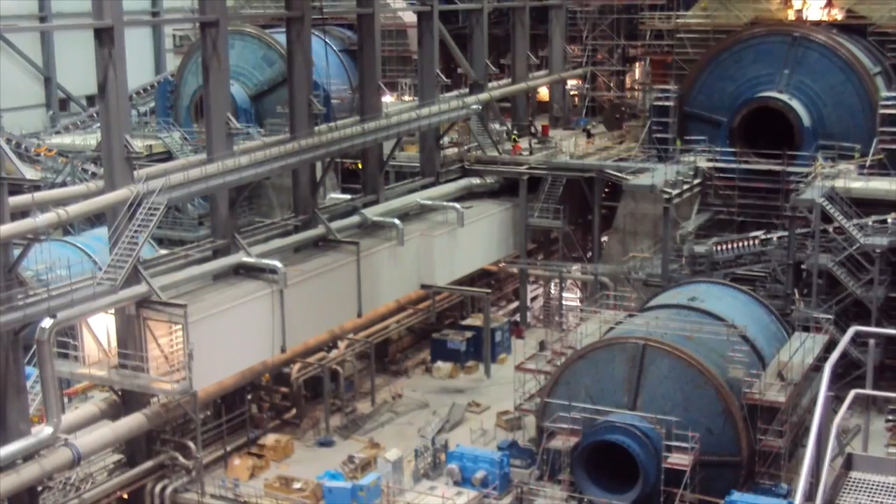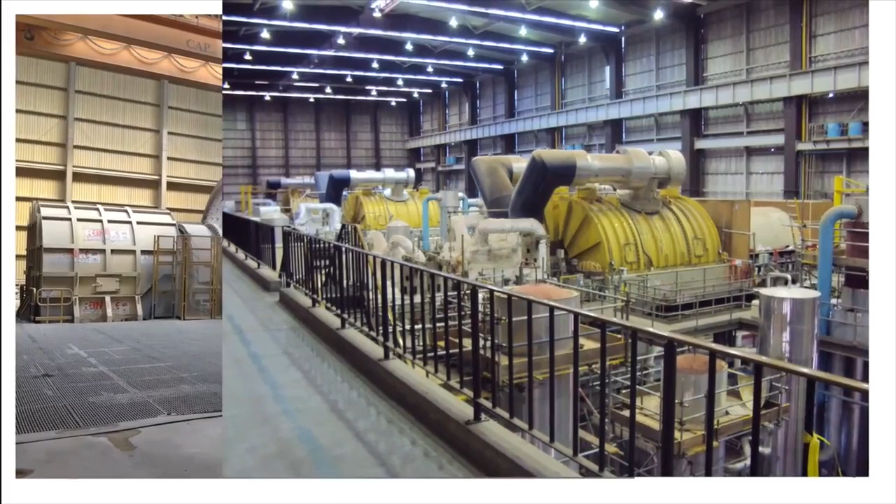Our specialist workforce in large rotating machines in both the mining and power generation industries enables us to offer extensive field services to clients large and small. Whether you need a turnkey solution or just a few extra staff, our services include consultation, project supervision, test and inspection, dry ice cleaning, full installations, rewinds and re-wedges.

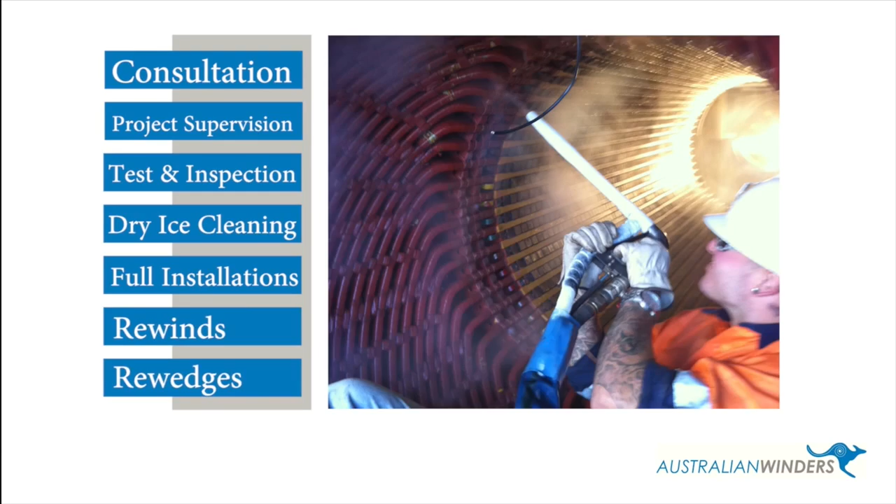Our global team gives us the ability to respond quickly for urgent repairs, to have you back in service with a cost-effective and quality solution.

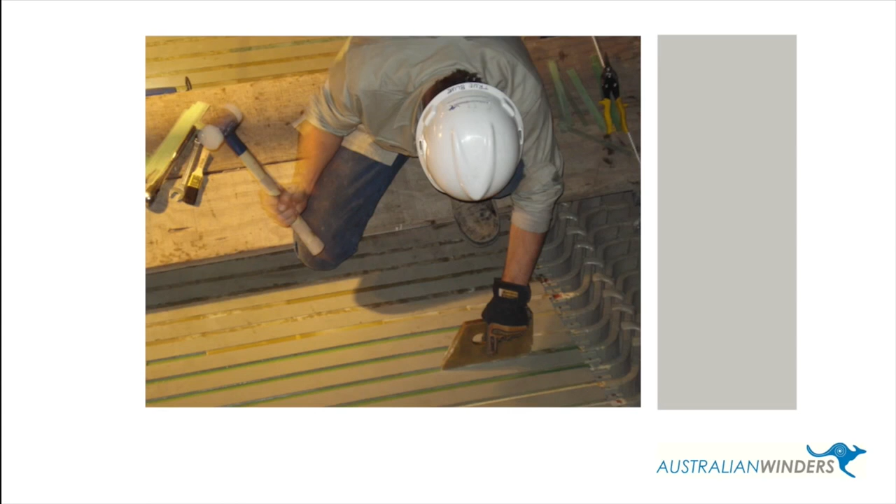Our clients come from the mining and power generation industries with names such as SIEMENS, Voith Hydropower Generation, TOSHIBA, ABB, TSSI, PPL, Energy Plus, Synergy, Territory Generation, TNB, Snowy Hydro, GDF Suez and GE.

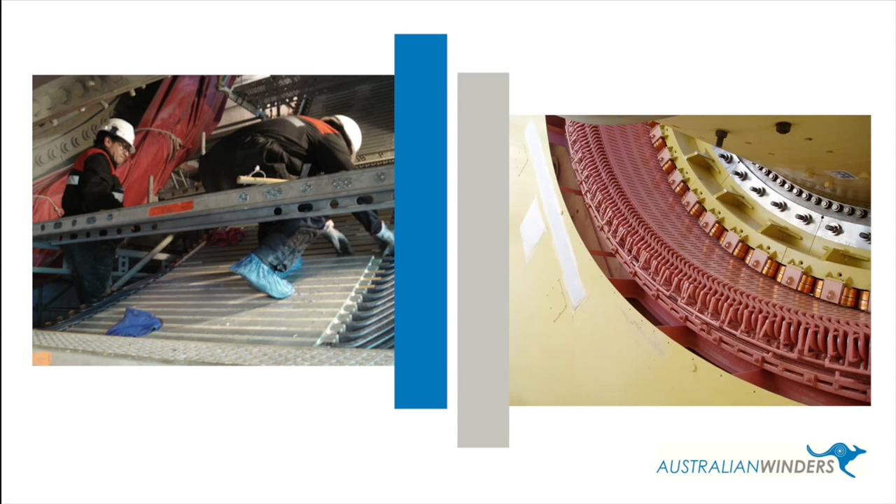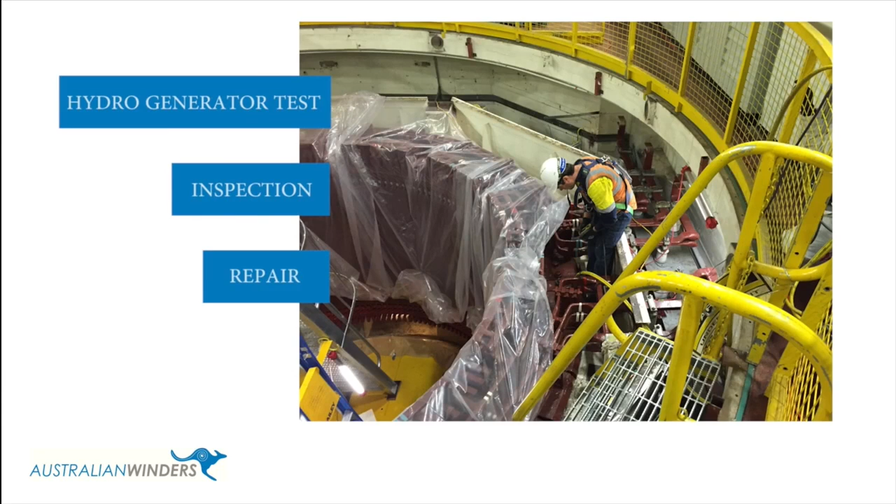We've completed projects for companies across the globe, including numerous large ring motor projects, rewinding and repairing from Chile to Sweden and the USA, turbine rotor rewinds in Germany, a 105 megawatt Toshiba repair in Malaysia, hydro generator test, inspection and repair for Snowy Hydro, SAG mill install and winding supervision in Mongolia, Zambia and Australia, and numerous generator rewinds, partial rewinds, in Belgium and Spain.

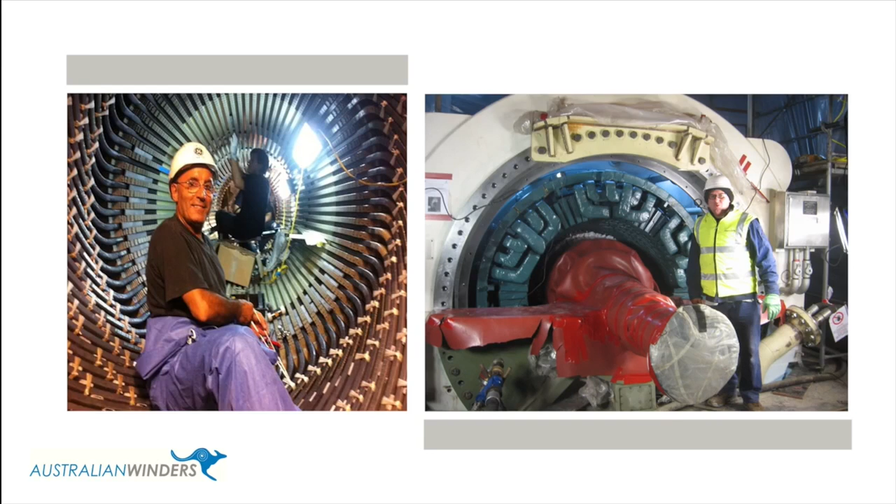In conjunction with Dr. Michael Zanidarich of GMEX, we can also provide engineering support and consultations, which are supported by our comprehensive in-house workshop services.

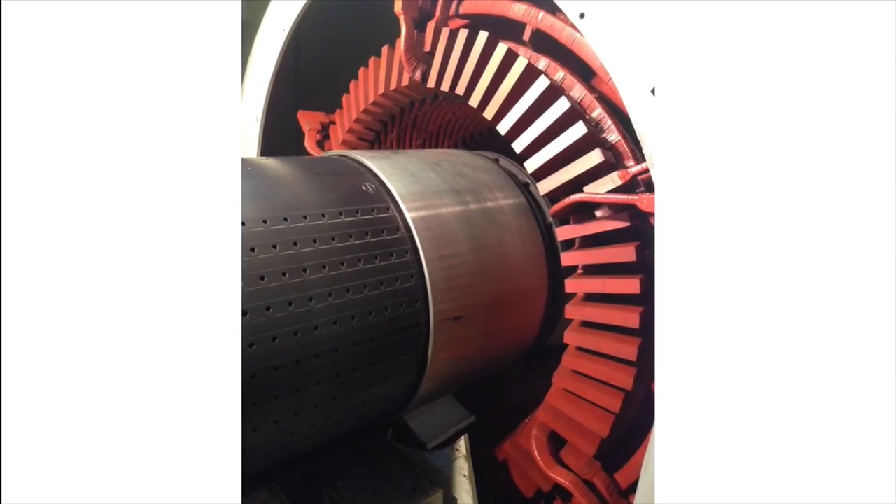Be it HV machines or LV motors, AC or DC, Australian Winders has professionals with experience in repairs and winding services to most industrial machines.

Our static testing equipment and a 10-ton overhead crane mean that we can perform top quality winding services to your machine. Our new wedge manufacturing facility gives us the capability to manufacture full industrial machine wedge kits, including the supply of ancillary components such as epoxies, resins and finishing paints.

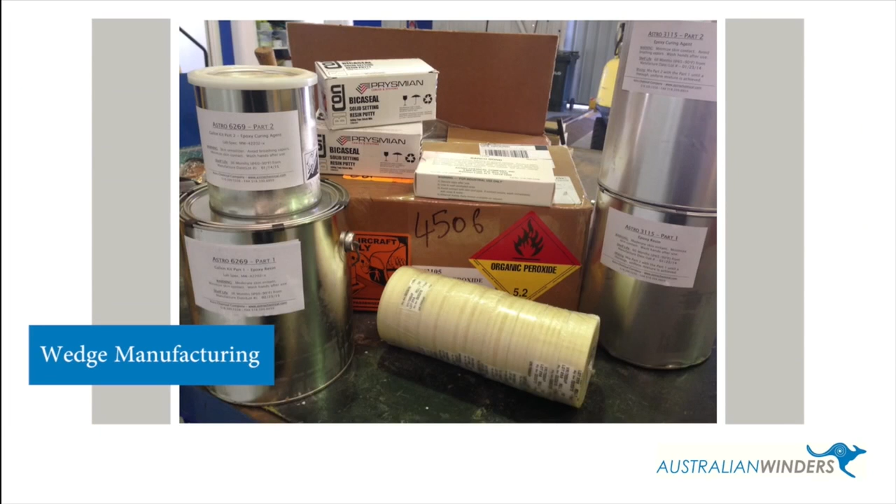We also offer high-quality soft or hard type coil design and manufacture, or we can assist with the supply of large machine windings available from reputable suppliers worldwide.

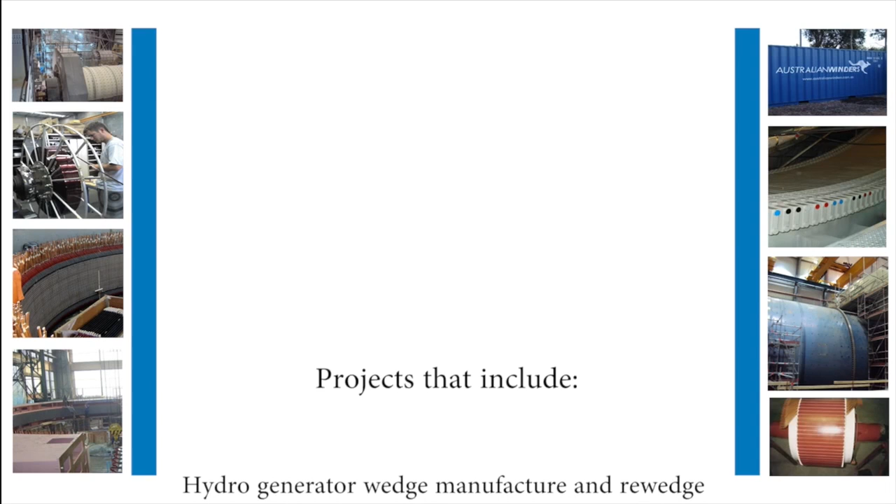Our global expertise and our manufacturing capabilities have enabled us to complete projects that include hydro generator wedge manufacture and re-wedge assistance for Hydro Tasmania, a 75 megawatt hydro generator re-wedge and refurb in the USA.

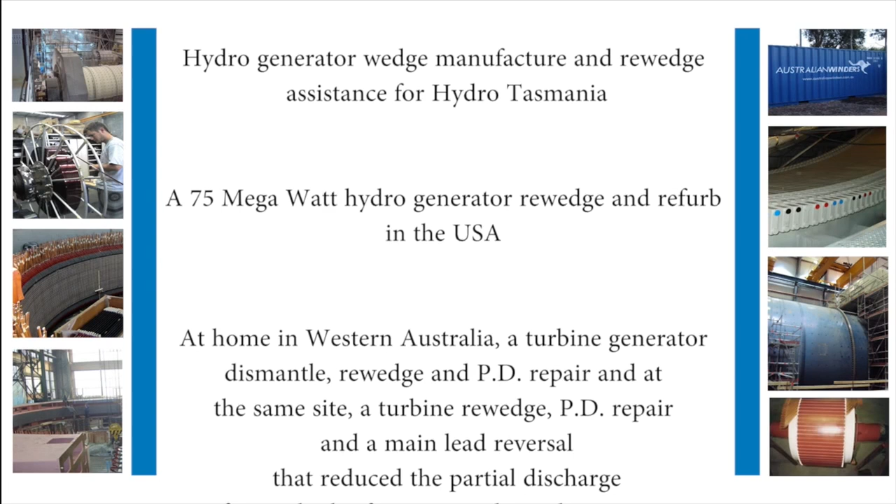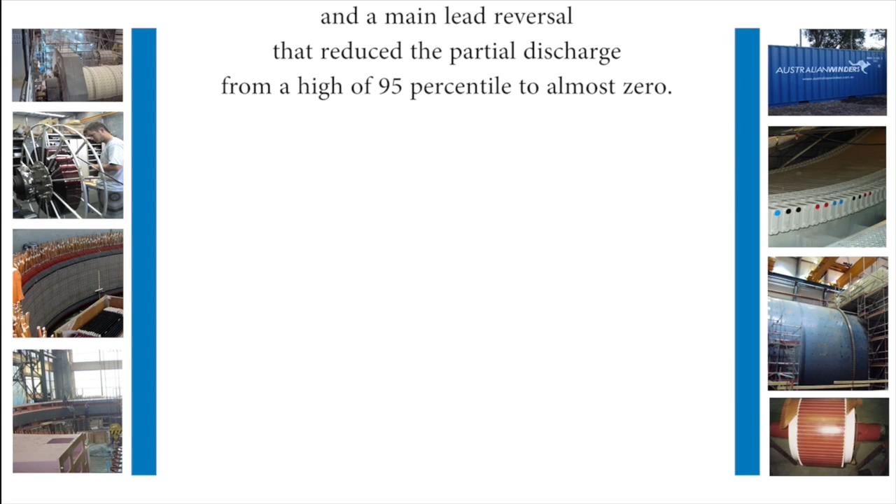Here at home in Western Australia, a turbine generator dismantle, re-wedge and PD repair, and at the same site, a turbine generator re-wedge, PD repair and a main lead reversal that reduced the partial discharge from a high of 95 percentile to almost zero. We pride ourselves on working with our clients to ensure the safety and efficiency of their operations.

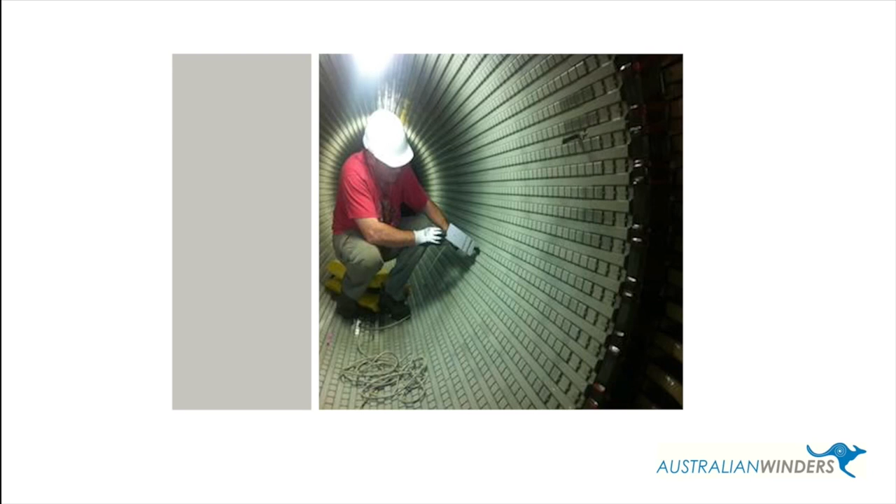As a company, Australian Winders is dedicated to safety, quality, efficiency, training and reinvesting to ensure the sustainability and progress of the industry. We're an equal opportunity employer, offering the very best in products and services, coupled with highly trained and experienced industry professionals, enabling us to deliver the total package to our clients.

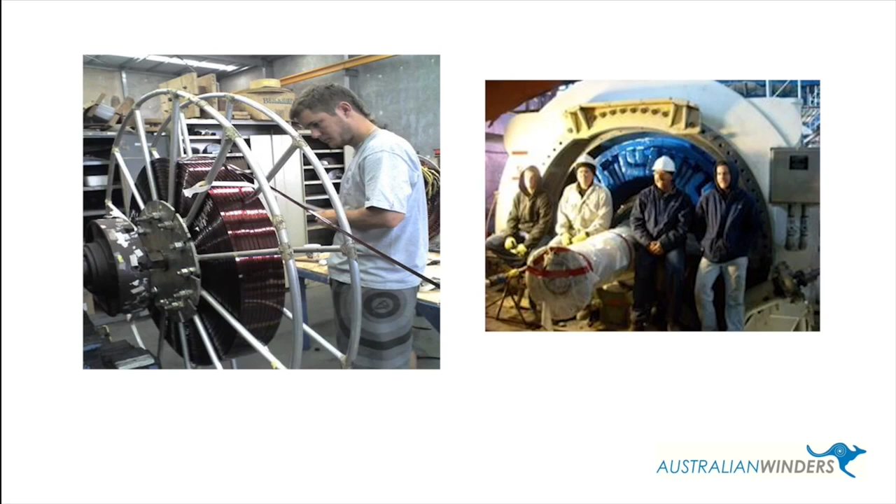Australian Winders, globally the first choice in rotating machinery, installation and repair.

I'm a winder by trade with many years experience, and that's how we set up the company, and we travelled all together, did the work hands-on. Not so much nowadays because I've got very good people under me that can take control of site work and that sort of thing. But we have a great deal of knowledge.

We've over 600 years of collective experience in the group. So if I can't do it, I know I'm going to get some very good help and some very good advice from some of my colleagues.

We've been known to send people to site the next day after the phone call, actually on the next flight after the initial phone call. We have all the equipment here in-house. We can send it away in our sea containers of tooling. We have specialised industry-specific machines and tooling, testing equipment, and we are 24/7 and we activate straight away from a phone call if necessary.

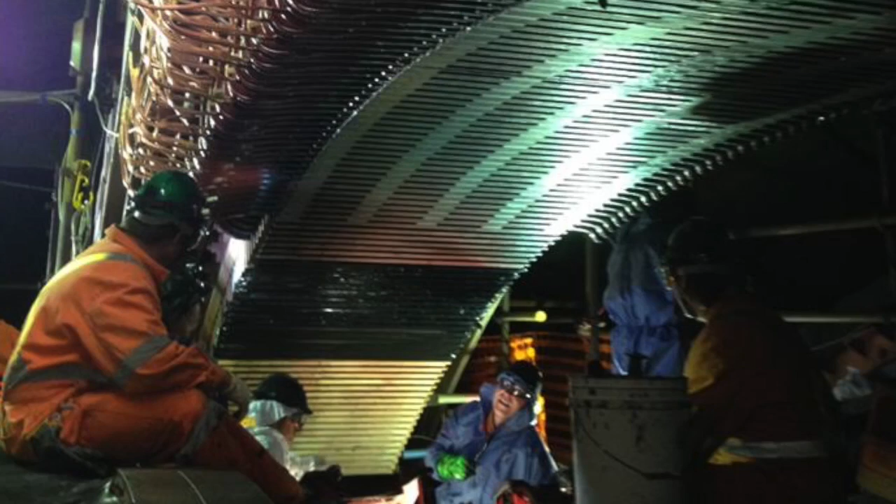Be it Olympic Dam in South Australia, an urgent breakdown on a Siemens 18 megawatt SAG mill - a very high profile repair for both BHP and Siemens, two different ways. Australian Winders played a big role in the repair. We proved that Siemens mills can be rewound when in the industry it was understood they could not be repaired. For BHP, we managed to get BHP producing again in 6 months rather than 2 years.

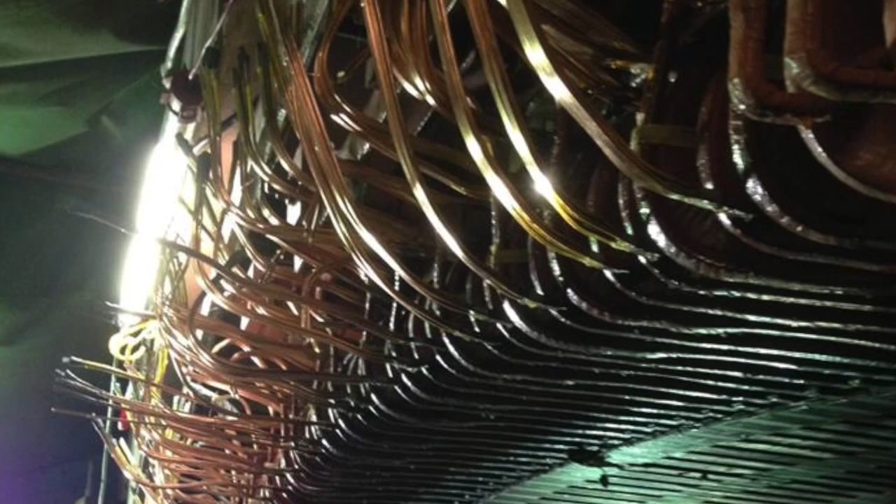Australian Winders took a large part in 3 different mill installations at this site in Escondida in Chile. At this particular site, we were the main subcontractor of 3 supporting contractors, with the majority of experienced winders on the site. This is done on the edge of the Atacama Desert, harsh conditions, and the projects got done by the actual end date, so everybody was very happy.

This contract was quite interesting. I attended this one also. This is a contract for ABB Switzerland again. Here we're working above the Arctic Circle, installing 2 large SAG mills, which were done very successfully in harsh conditions, outside the actual workshop, not inside the workshop.

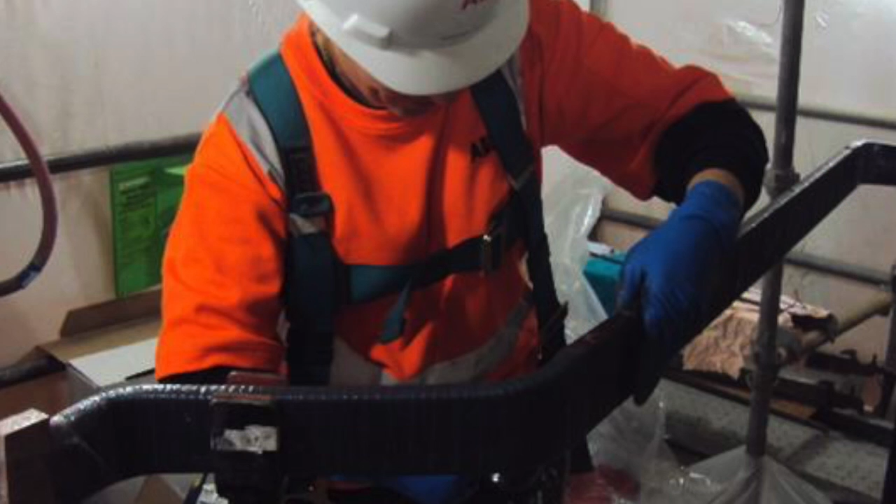Another ABB mill rewind that Australian Winders supplied the majority of experienced winders for. This photo shows the windings being prepared for insertion. This was a very successful project in the old USA.

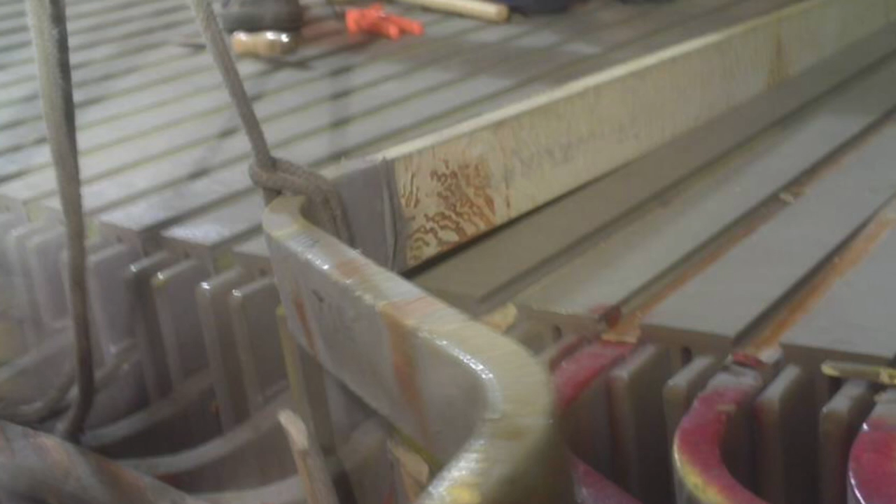This project was a very urgent breakdown repair for ABB Switzerland again. This one was located in the jungles of Brazil. Not only did our team battle the issues on the job and get it done successfully, but had to battle a range of unusual creatures from the jungle.

This is a water leak repair on a 200 megawatt Parsons unit, one of a few projects of this nature for Siemens Power Australia. Australian Winders invested in an induction welding machine a few years ago, whereby Siemens don't have this type of machine, so that's why they contracted us. This is a delicate brazed welding repair that Australian Winders are now fully capable of performing successfully.

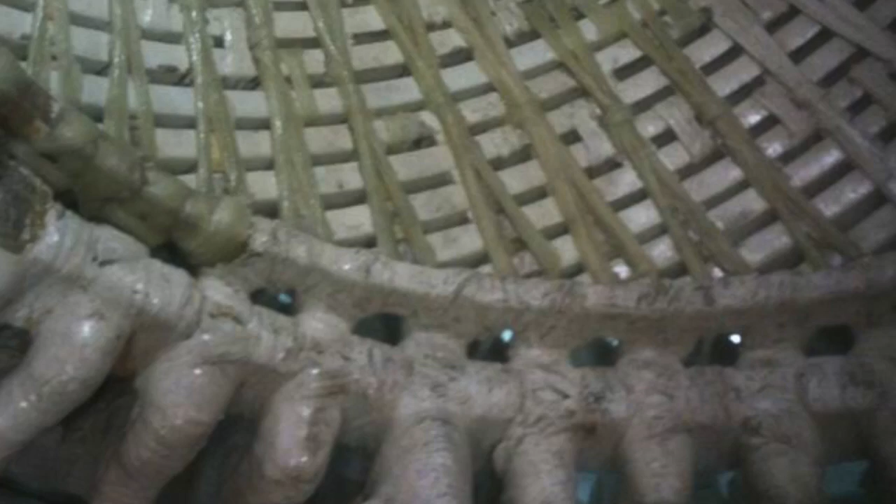This is just a quick repair for us. We assisted the Toshiba generator engineers from Japan. This isn't a great photo of the repair, but it's a 620 megawatt unit in New South Wales. Very successful, and the job got done in good time.

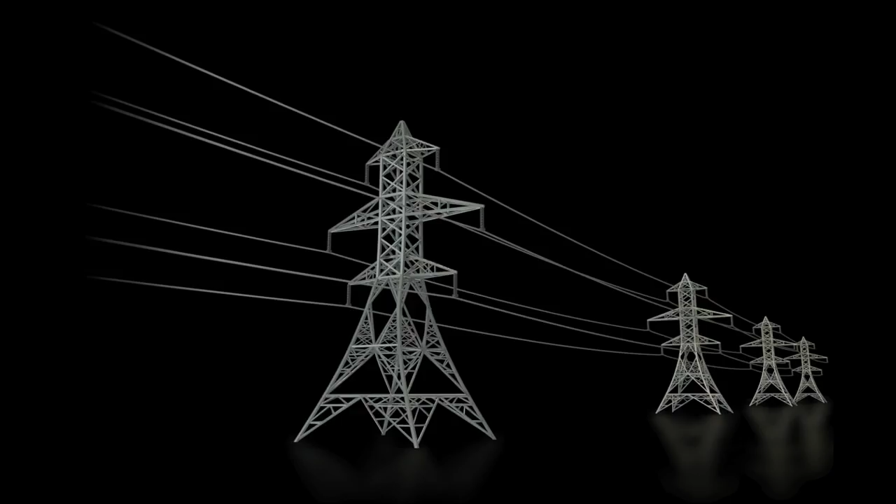This project was a complete stator re-wedge where we were contracted by Siemens Power Australia, Collie in WA. This one was made much more difficult as the previous re-wedge project, about 10 years earlier, used epoxy to glue in all the wedges, which gave us the hard work of chiseling out every single wedge, which was in the thousands. So it took quite some time, made more difficult by the incorrect insertion 10 years ago.

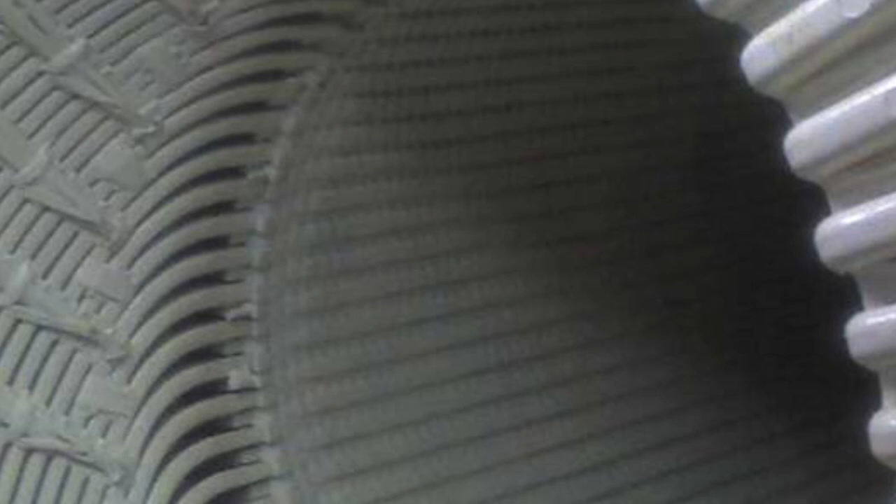As part of a previous alliance with NEC from USA, we played a major part in this urgent breakdown repair. Initial thoughts were that this generator would require rewinding. Australian Winders were able to perform on-site repairs, mainly to allow the generators to operate for at least 10 months before the end user could schedule a rewind. That was 7 years ago, and the generator is still running to this day without the rewind. So we've done a very good job there.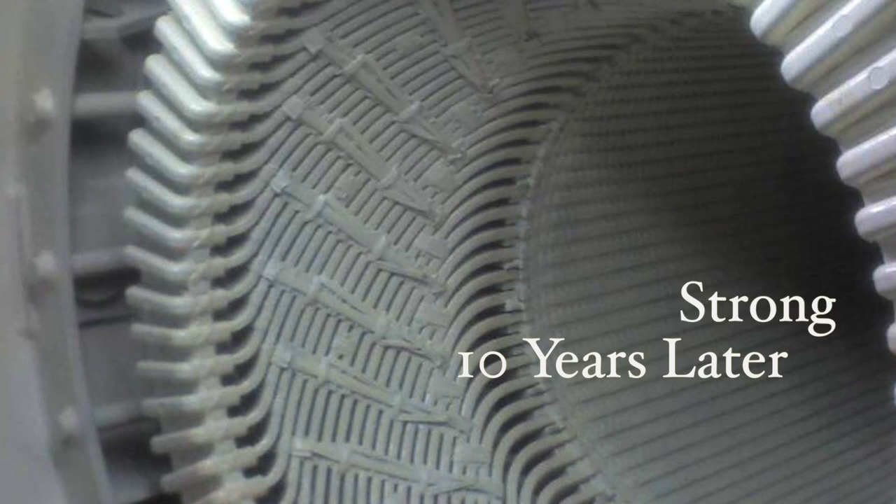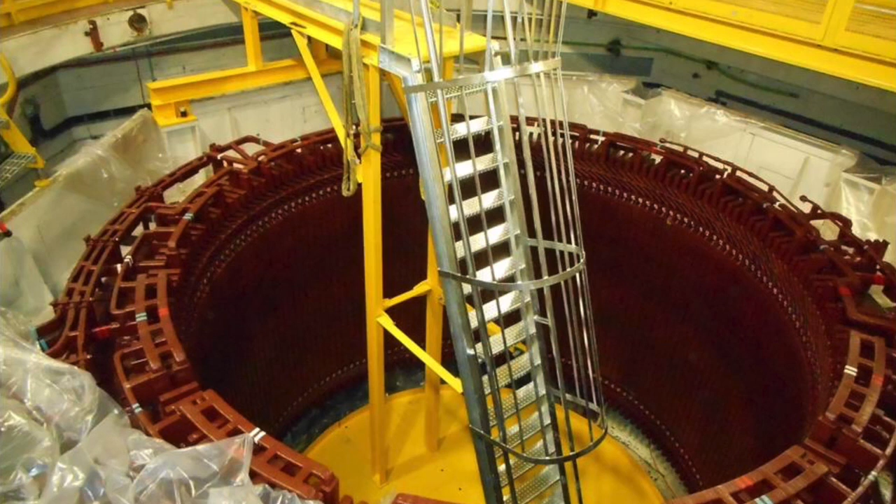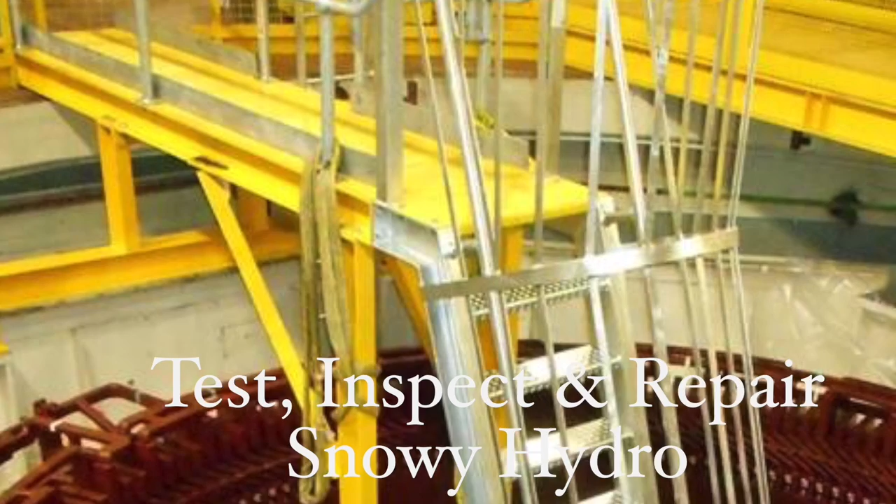This is one of Australian Winders' first main contracts with a large power producer, Snowy Hydro. This was a test, inspect and repair contract, which we successfully won over some major OEM companies. Our customer, Snowy Hydro, gave very good and positive comments, assuring us that we would definitely be contracted for the next project next year.

Two large generator rewinds as subcontract to GE from the United Kingdom. We had 10 winders on site for 4 months in Spain. This established a great business partnership with GE, ongoing for many years.

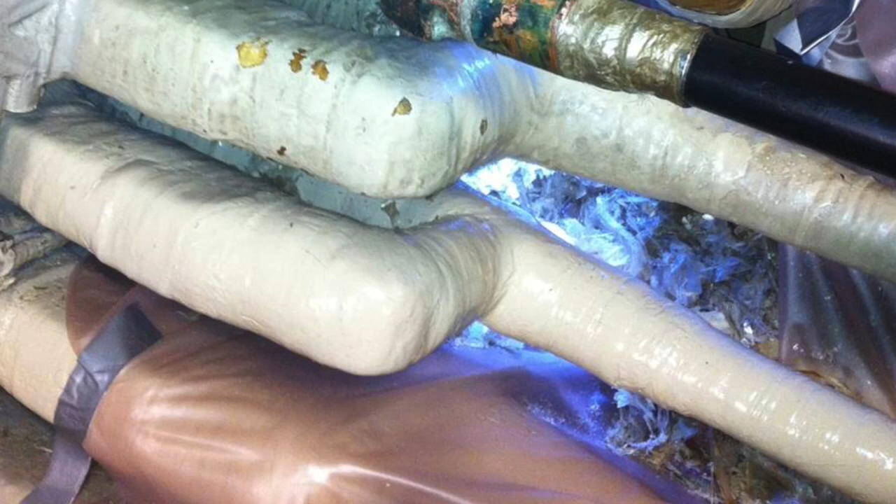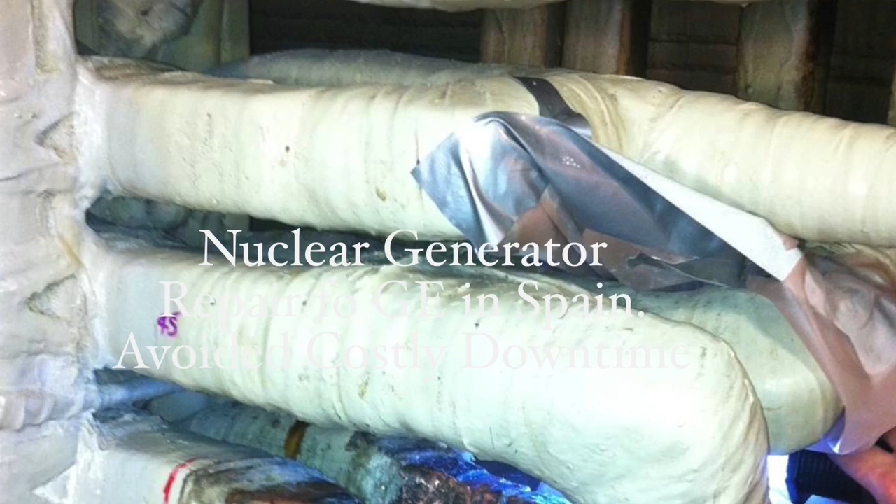This was a 1,000 megawatt nuclear generator. This wasn't a small project, even though the work we had was only minor. It's another GE project in Spain. This skilled repair was successfully completed and meant that the generator could go back online straight away with minimal downtime.

We had 6 winders contracted to work in a GE rotor repair shop in Germany. We had 2 rotors going at the same time. It was a great deal of experience that we gained from this project and helped out the customer greatly. They're very appreciative of the work that we did.

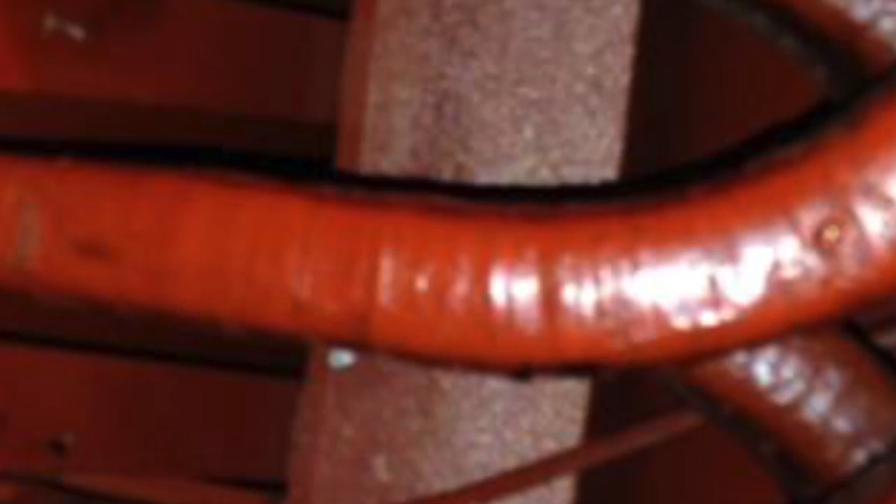Another main contract for a power producer who is one of the largest in the world, which is GDF Suez. This was a very successful partial discharge repair with a main lead reversal that reduced the online partial discharge recordings from a very high 95 percentile to almost zero. This has prolonged the life of the generator for many, many years.

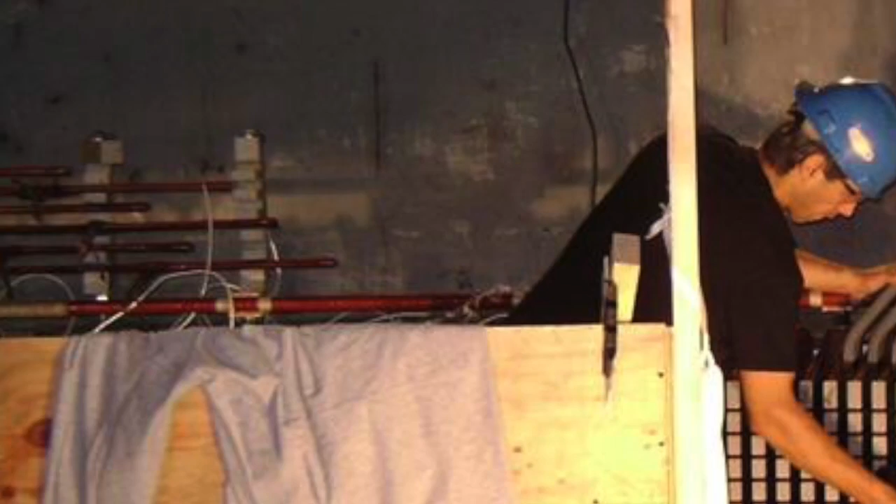This is one of our very first rewind projects in conjunction with NEC in our alliance. This was a complete restack of the iron core and a full rewind. It was great to be part of a successful project with NEC.

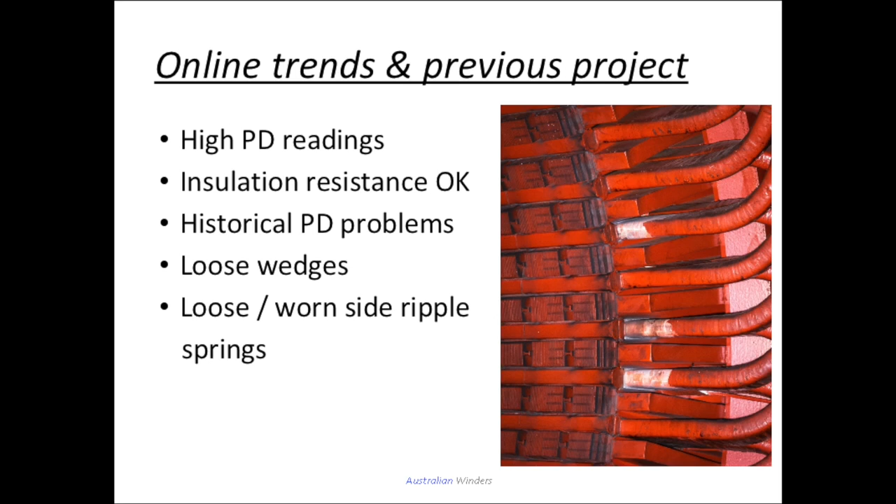The case study is about a repair that we did for GDF Suez on main contract. They had historical problems with the partial discharge readings of the windings. Partial discharge is a very corrosive type of phenomena that breaks down the winding insulation, so it needed to be looked at. Our job was to pull apart the generator and have a look at the problems they're having.

We formed a solution, which we did very, very successfully, reducing the partial discharge online recordings from about 95% high to almost zero, which is unheard of in the industry. We were very successful, customers over the moon, and I'm sure there's one more to go, and I'm pretty sure we'll get that project also.

I'm a winder by trade with many years' experience, and that's how we set up the company, and we traveled together, doing the work hands-on. Not so much nowadays because I've got very good people under me that can take control of site work and that sort of thing, but we have a great deal of knowledge.

We've over 600 years of collective experience in the group, so if I can't do it, I know I'm going to get some very good help and advice from some of my colleagues. We've been known to send people to site the next day after the phone call, actually on the next flight after the initial phone call.

We have all the equipment here in-house. We can send it away in our sea containers of tooling. We have specialized industry-specific machines and tooling, testing equipment, and we are 24/7 and we activate straight away from a phone call if necessary.